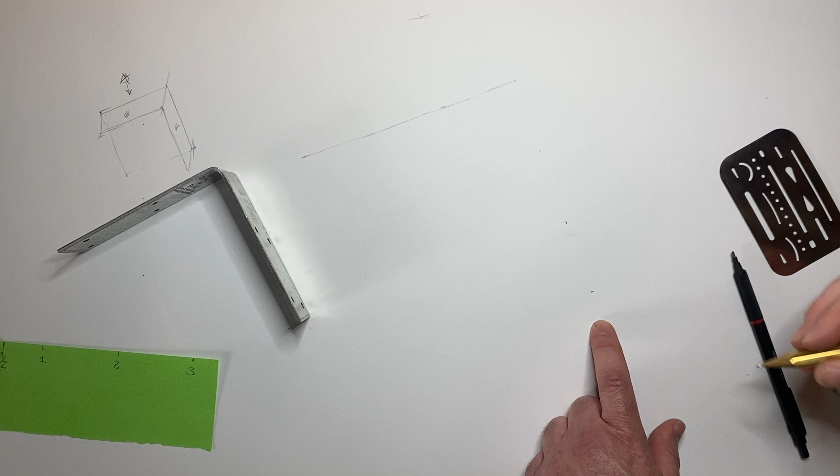So it's a little bigger than life size. I want to fill the page as much as I can. Now again, I could go ahead here and construct my next part, right? So, you know, we need another 3, so let's try where that would be and see if we got it reasonably well. Not bad. This is our corner if we wanted to draw another edge, but not too worried about that.

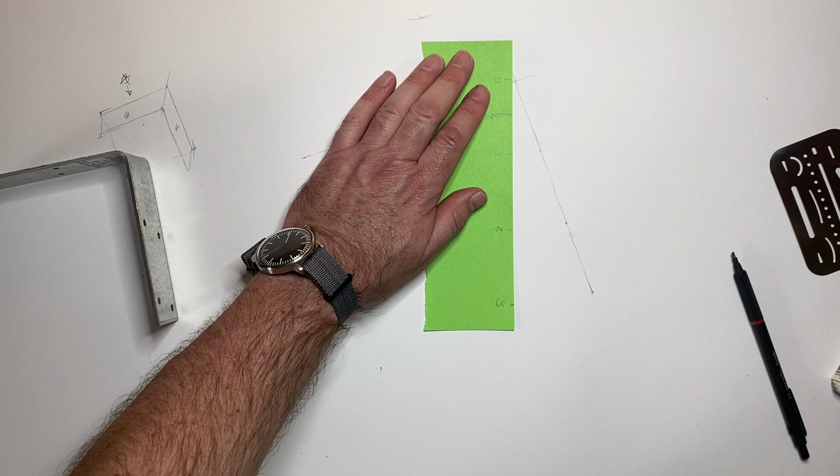However, we do need a vertical. Now it's 1 unit, so we're saying this is 3 units, 4.5, 1.5, which is a third of that, so 1 unit down, so we're going to use this half again. So half a unit down because of our compression in the dimetric. So this is, say for example, 3 units, 3 units,

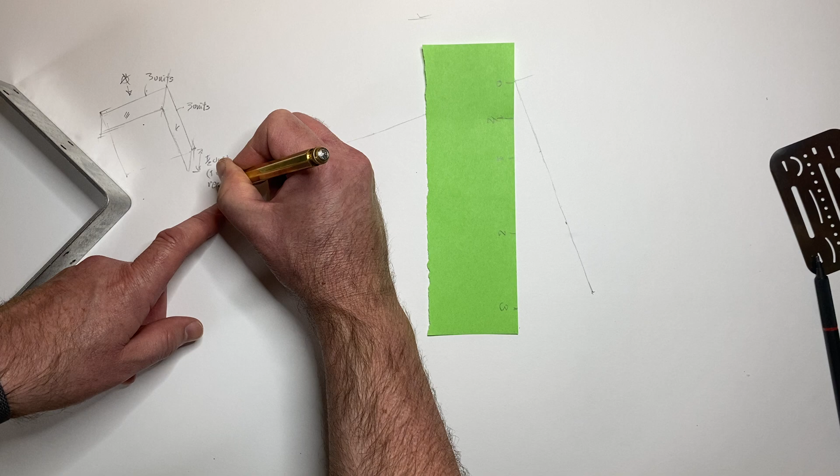and normally this would be 1. But for us, because of the dimetric, we're going to be going half a unit, which is 1 unit real. Half a unit. Okay, so measuring this off, again, to reiterate, 3 units long, 1 unit in reality, but because of the projection, it's half, 50%, so it's half a unit.

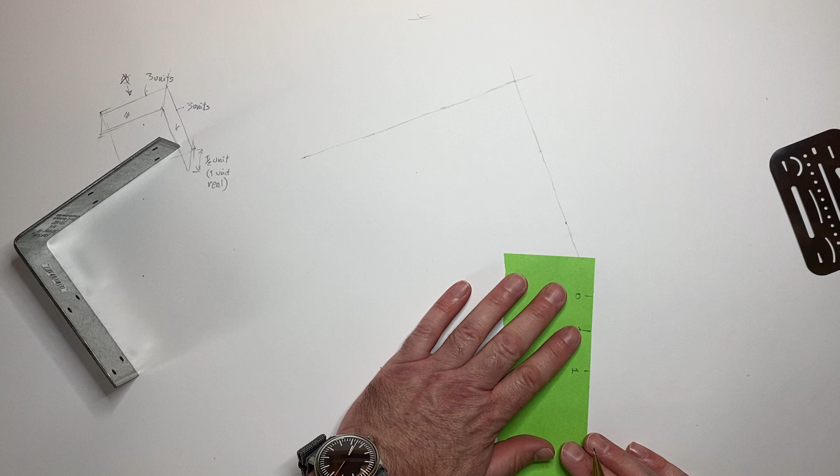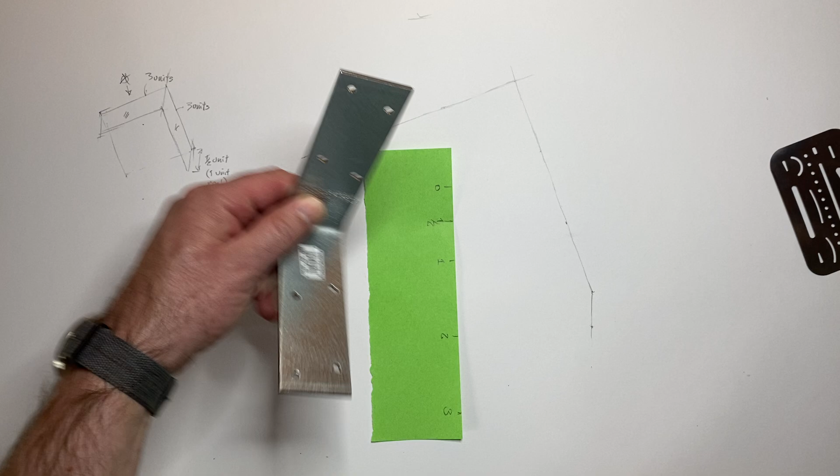After all that, to use my stick, or my measuring stick, I'm looking at the side of the paper here, which you can't see. Trying to get it fairly straight. There's 1, there's a half. Quite small, because it is quite a thin part. So no shock there. Again, we're going the other way. Try and get a vertical, make sure we've done a reasonable job here. Nope. Arcing around. It is hard to get this right.

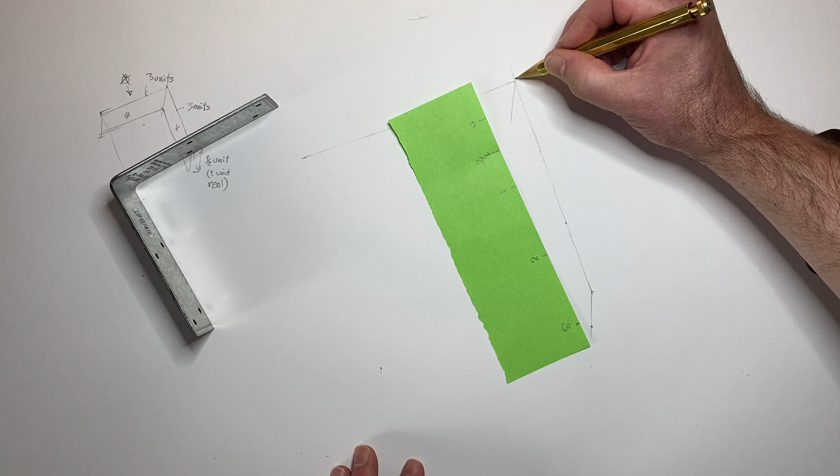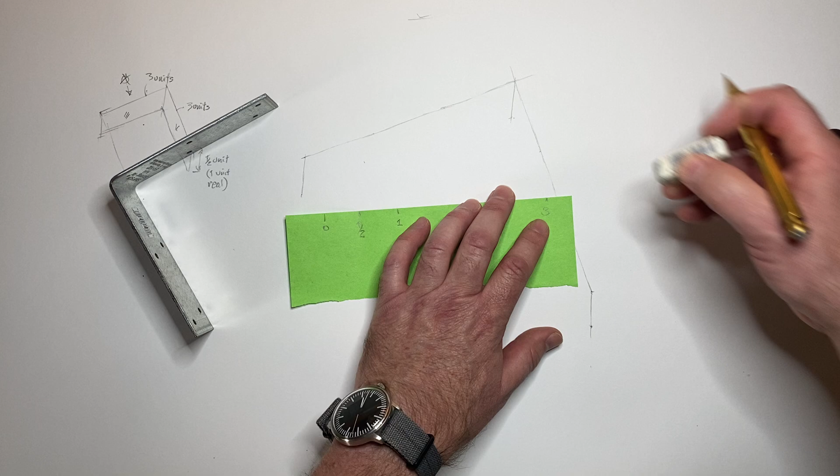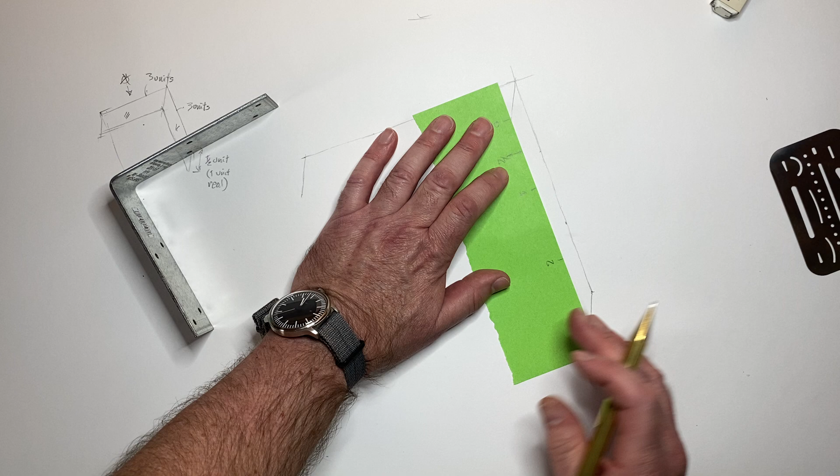So the ruler does help. So we've got 3. Trying to keep it parallel. Make sure we got it right. That's good. And if we want, we can add some dots again. If we lose our mark, we can erase this other one, so it doesn't confuse the video. Again, we can give ourselves some helping dots, helping hand. This is quite close, so this does tend to be quite difficult to sketch. Connect them up.

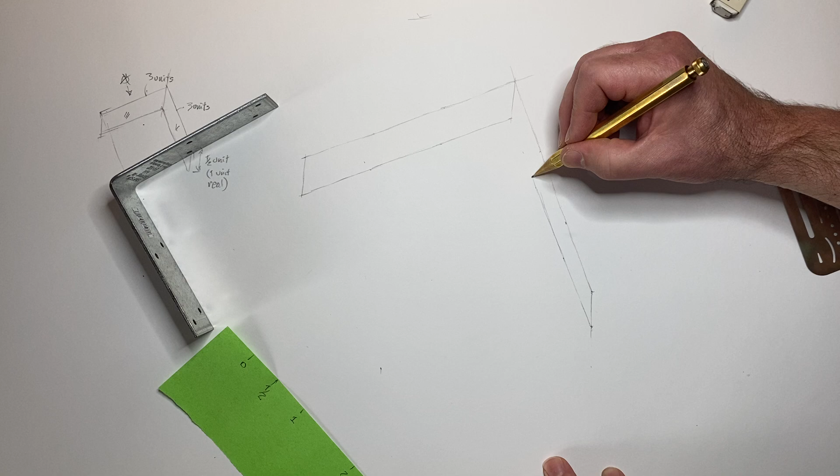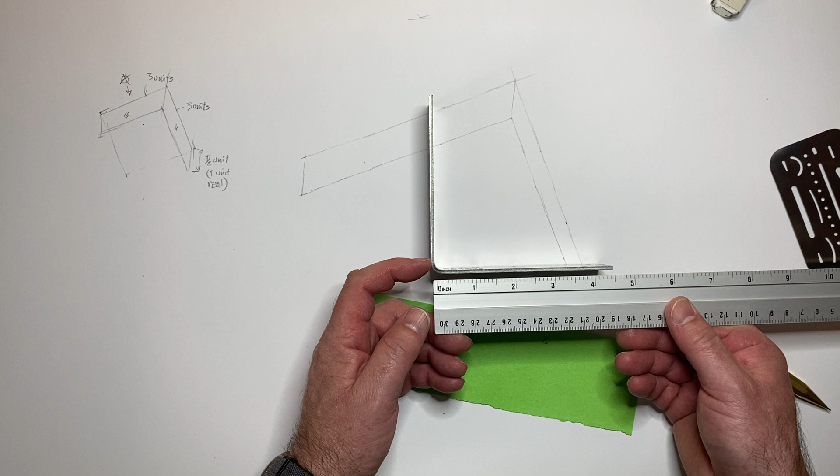Ooh. Now, which way? So we got 1 option, 2 options. Let's have a quick look. There's something strange about the measurements. See if we can, I hope this is focused, but 4.5. This is actually to the inside edge, if you notice. Whereas this guy goes to the outside edge.

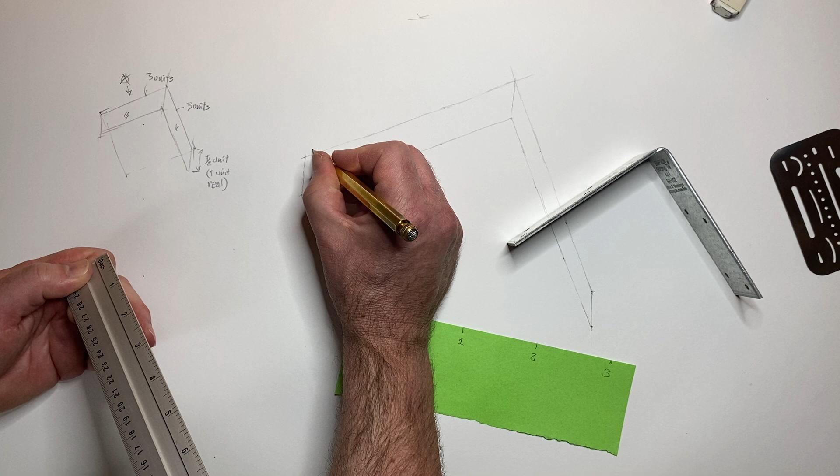So what does that mean for us? So that's our full length. This one's on the outside. So if we, for example, put our little helper here, this one's on the outside, the thickness. This one's on the inside. Now, I don't want to make this any thinner. It's also painful. So what if I say, okay, well, let's put this on the outside. Let's make sure we've got that right. So I want it to be the long length. I know it's very picky.

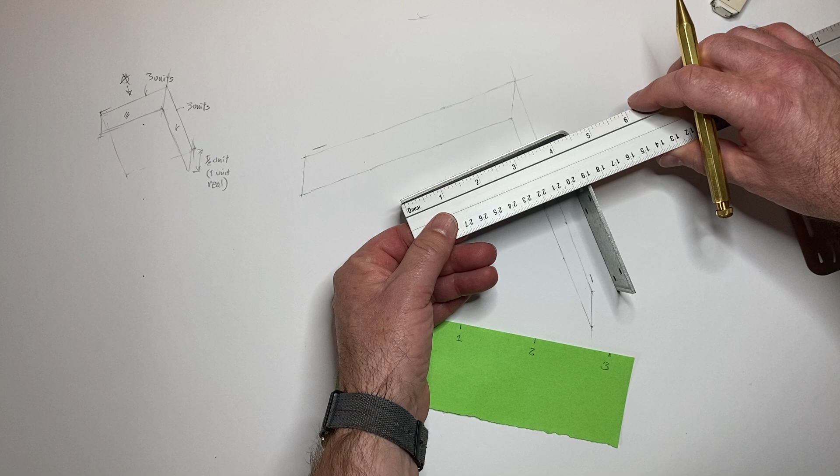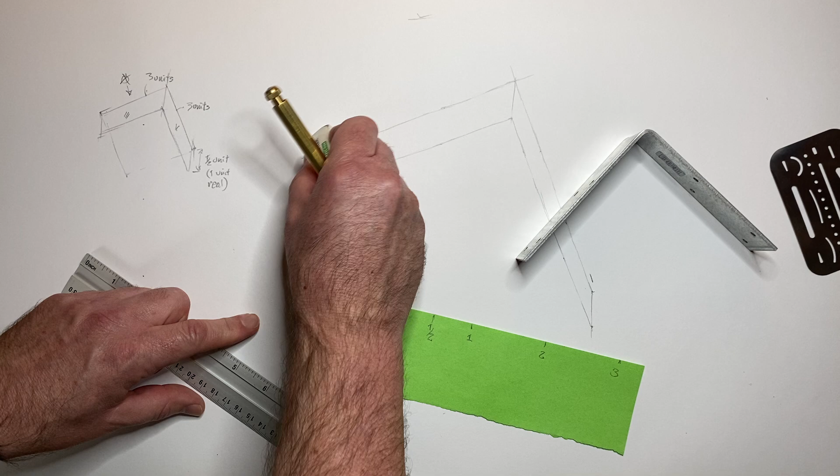4.5 on the inside. And that is to the outside. Hold on. 4.5. This is not on the inside. Sorry. I think I just said the same thing 4 times in a row. Anyway,

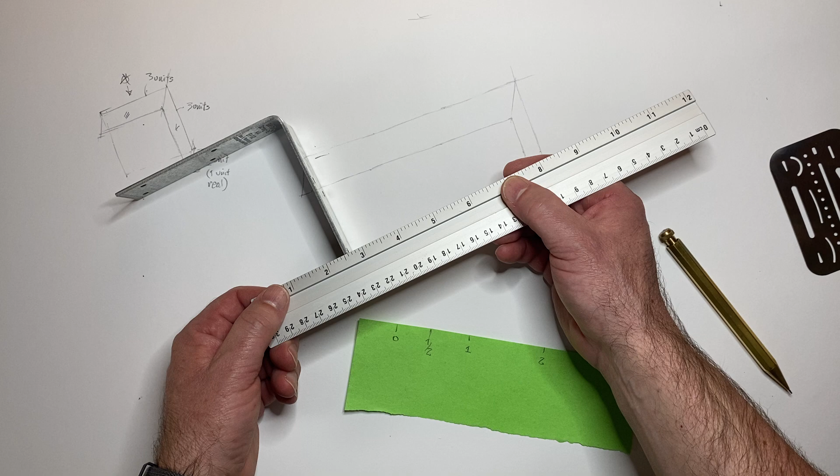this measurement here, the curve, the radius of this is actually, it looks like the same thickness as the plate. So let's see what that is. So I'm saying it's 1/8 of an inch, I think. Yep. So 1/8 of an inch, which is, what is that? It's an eighth of one of, hold on, units. And so there's all these problems, like which one are we taking? One way is just to say, okay, well, we're not making this ultra realistic. So let's go ahead here and just do an eighth of a unit. Won't be exact, maybe close enough.

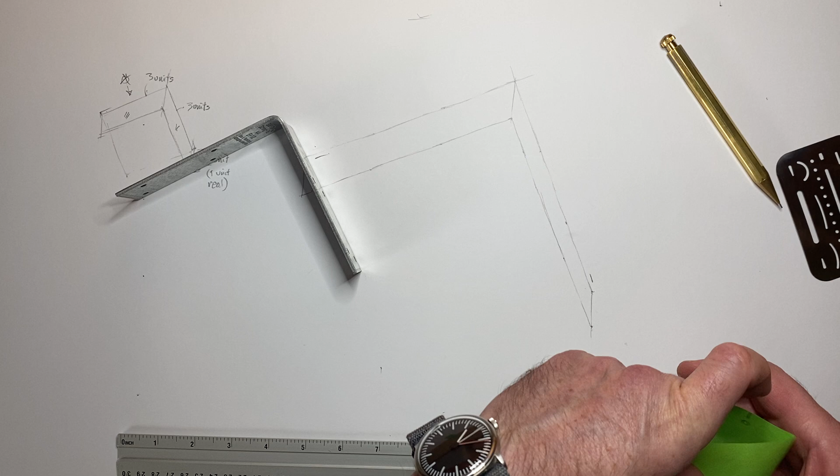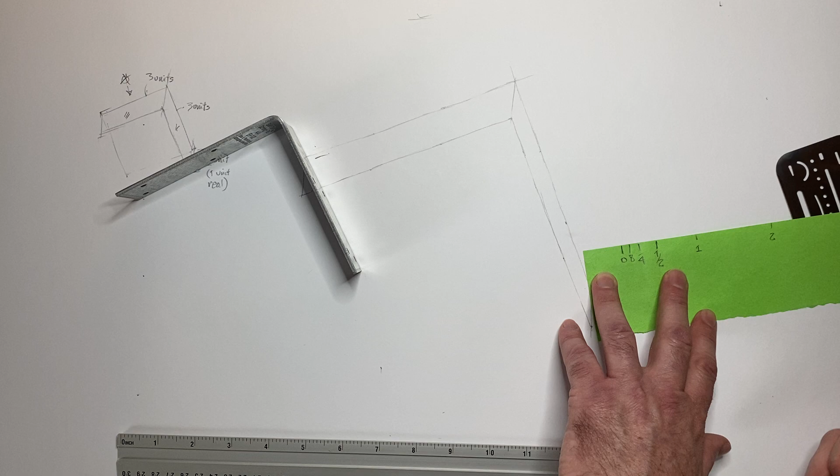How do we get an eighth? Fold it once more, quarter. Fold it once more, eighth. It gets really small, you can do your own, just do it by eye. There's our eighth. So let's go with that thickness. It's emphasized, it's way too big, but we're trying to show the viewer what we want them to see. So let's go with an eighth on the outside.

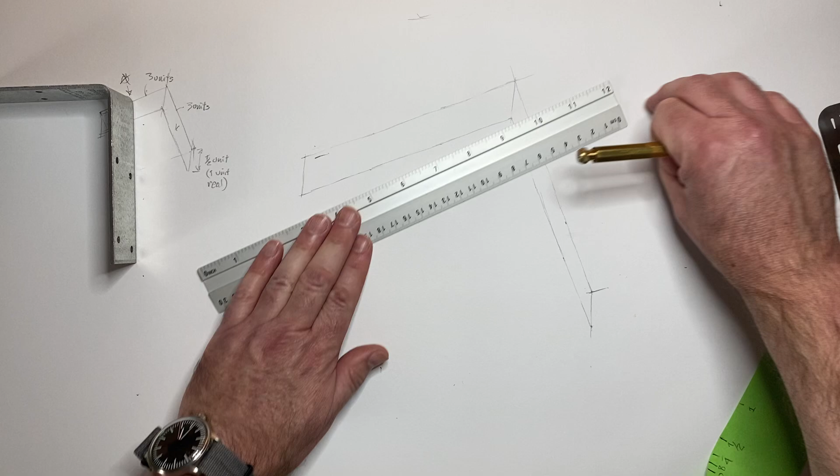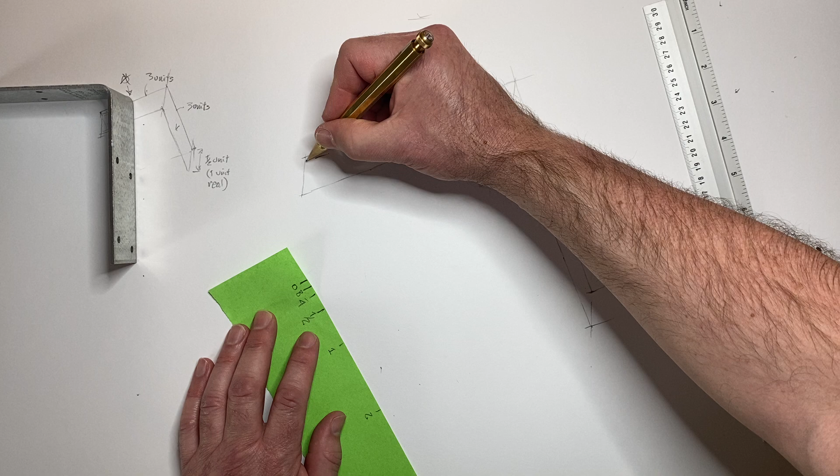Parallel in space, parallel in the sketch. So these two lines should be parallel. And are they? So sometimes it helps to use other things. Not really. Let's get rid of that overly ambitious angle. So the only thing I'm really concerned about is trying to keep parallelity or parallelness. Same on this guy. We're going inside this time. So parallel, parallel.

And we can use the measurement, because this is true shape, up here on the top. So because this is a square, and it's kind of a square, then we can just measure off directly here. We can put as many helpers as we wish on this ultra thin piece. Now we're going to the other side up here. So this is on the outside.

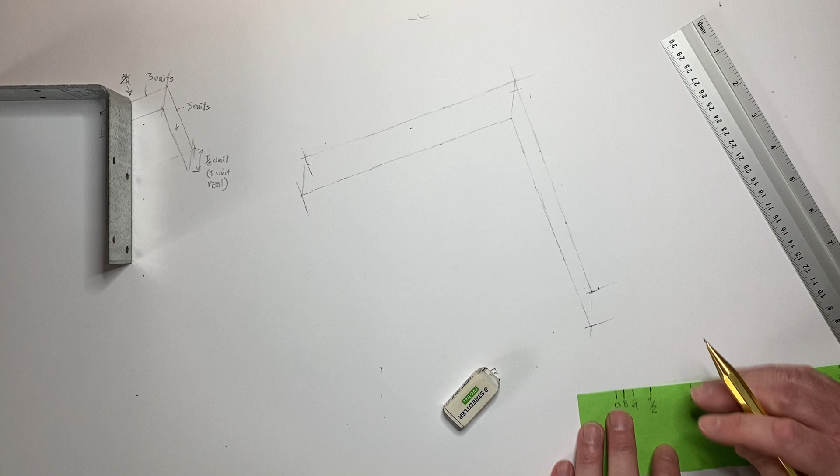And again, because there is another plane underneath, which is also true shape, we can measure that direct. So just to reiterate, this is our true shape, but because we have a straight profile, this underside is also true shape. So we can measure directly on there too. So what does that mean? It means that's our thickness at the end.

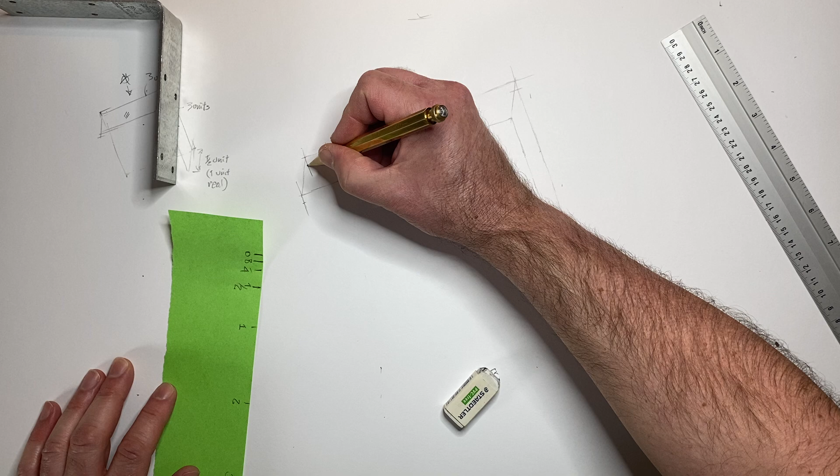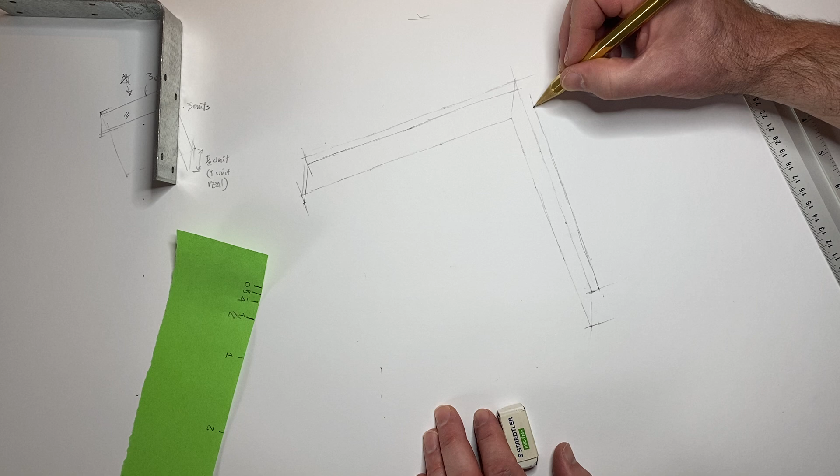Coming across really thick. I'm just going to go all the way here, but we're going to curve this later. So once we figure out where we are, parallel, get some helping lines here with a really weavy line. And then our thickness. I'm saying the inside radius of that curve is an eighth as well. So we're going to start trying to ignore the under construction, start and finish there. Same down here.

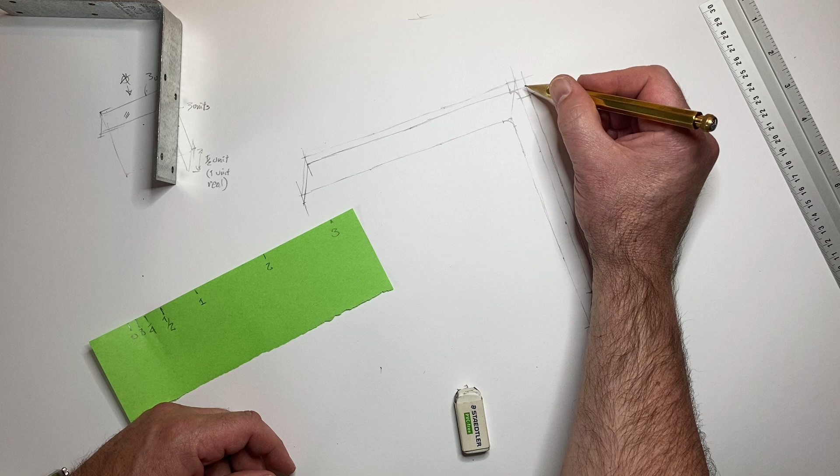There's ways to construct this and all this sort of stuff, but these are true shapes, so this will be a quarter circle. And the same up here, so the same size on both. Won't be able to see the back through this part, but we'll be able to see this backside of this arc. So we can kind of assume that it's bent smoothly, and it starts here and there, which will give us a quarter. You can see my sketch is not perfect, but it's not bad, I suppose.

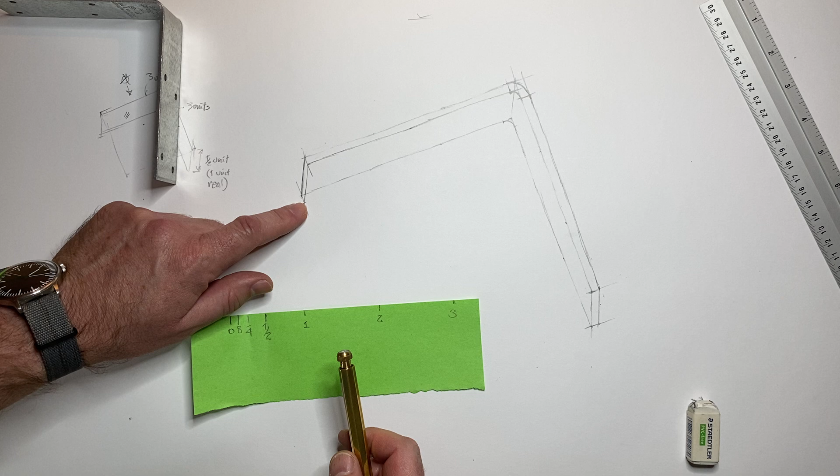So there's my arc. And the same will be on the back face, but we can't see that. So that's our shape. And we can now say we've discovered these edges. Now, I screwed up. So what's missing here? Well, I forgot to add the thickness underneath. Sorry about that. So let's fix it.

Give myself some help. Some of you have been sitting there going, you've missed it, bud. I'm going to erase this, even though it's probably not a big deal, but just so we can all see it. So there's our correct spot above this. So if you want, you could load that in. And we're an eighth.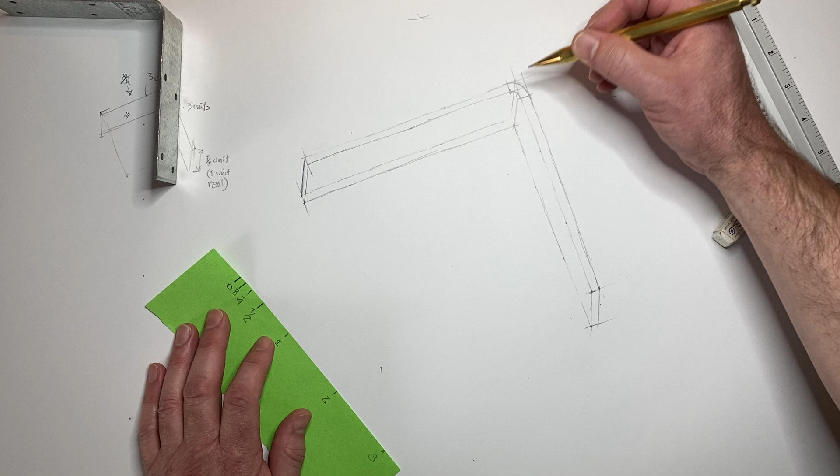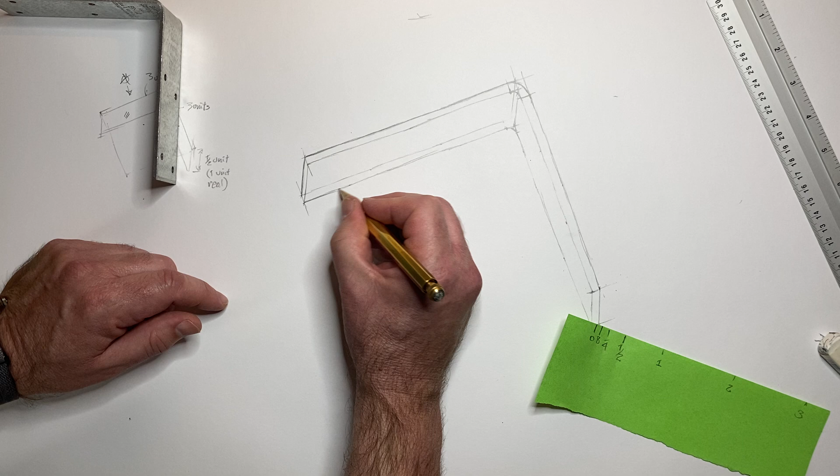That's more like it. So what we just did there, that check, let's make sure that our edges are all formed correctly. That's what that step is for. It usually catches errors that we've allowed or not noticed. It's not a big deal. You can always go in and fix it. Didn't do it on purpose, but it's not a bad thing to have happened. Make sure our edges are looking right. Kind of a preliminary before the hatching or the shaping.

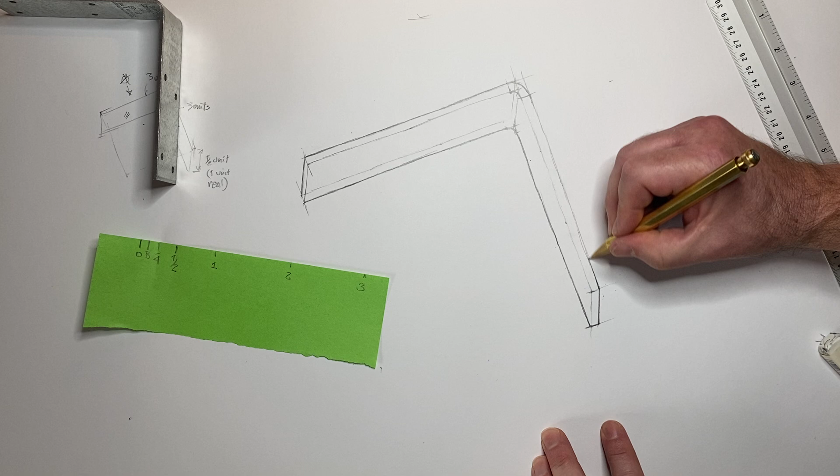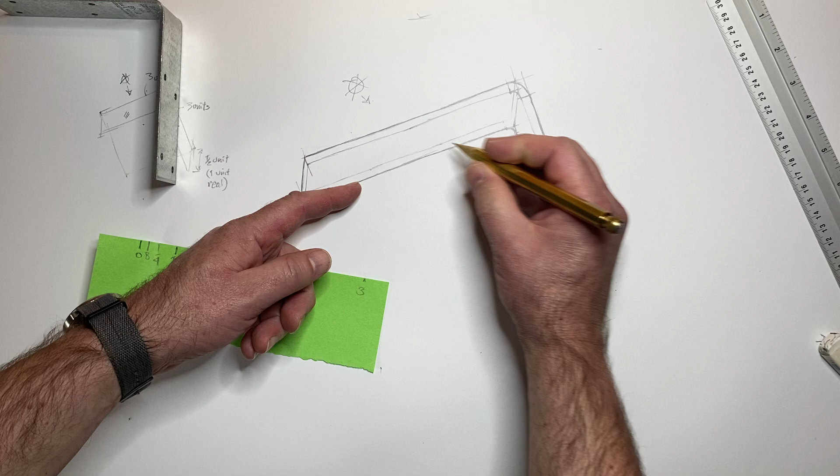Sun's up here. Now, this is going to be facing the sun more than this side. So this again is our 1, this is our 2, and that's our 3. The darkest, intermediate, and lightest. So the sun's kind of above and looking down. This will be hidden by the intervening wall, if you want to think of it that way. This will be second, it's further away, not the top, and this will be the last. Notice that there's 2 sets of 3s. One that goes all the way around, and then we'll have another 2 over here.

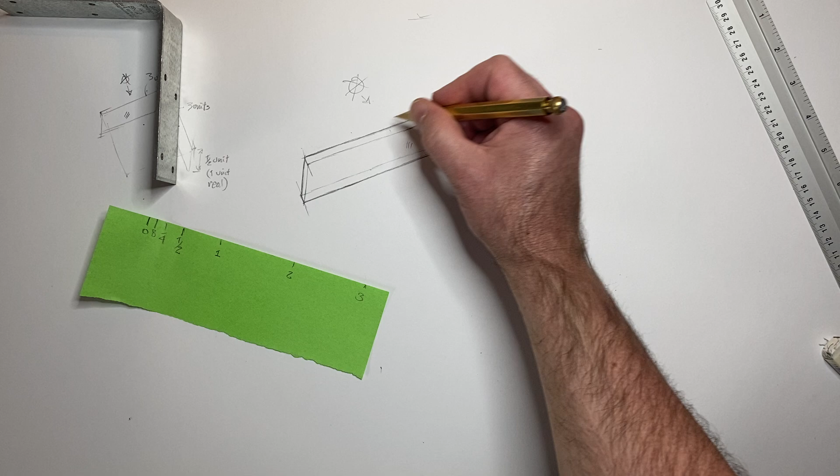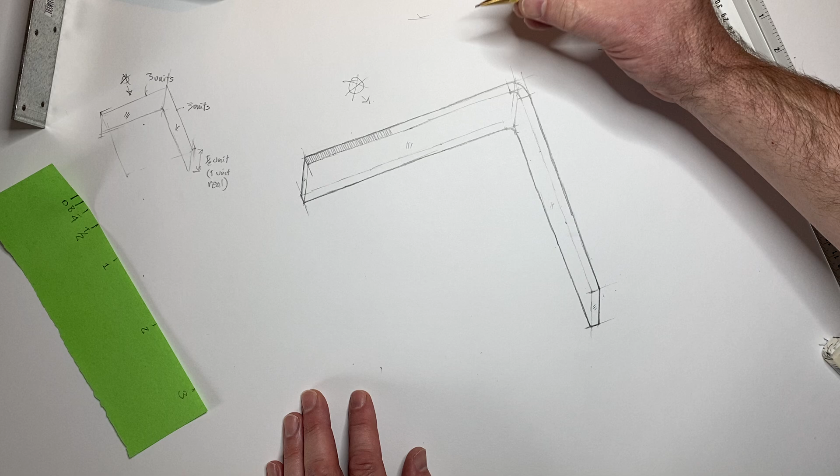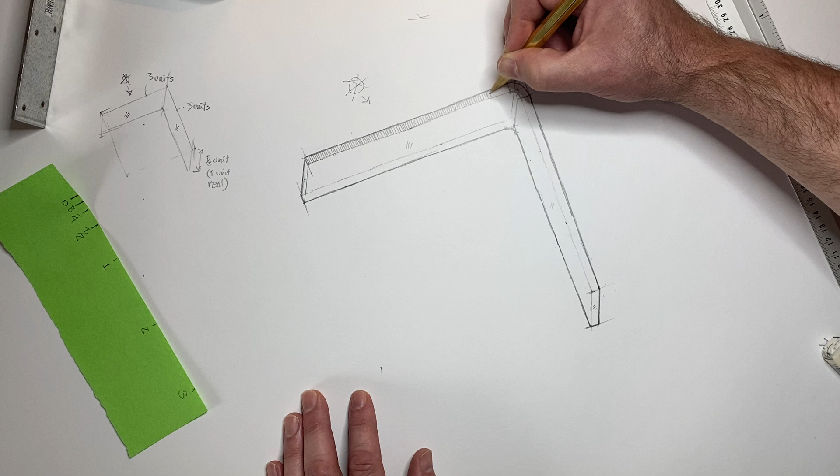That's the plan. We're not doing the holes, but we'd be able to measure those out with our unit stick if we wished. So let's go ahead here and just get started. The top is our easy unit, first lightest color, and just gonna continue right around. If I can. Trying to stay vertical, implying the shape here. So fun. Gonna stop here. Figure that out later, but I do want to go with its direction here, so it's a little artificial, but I'm going around trying to keep it the same. We'll return to that corner later.

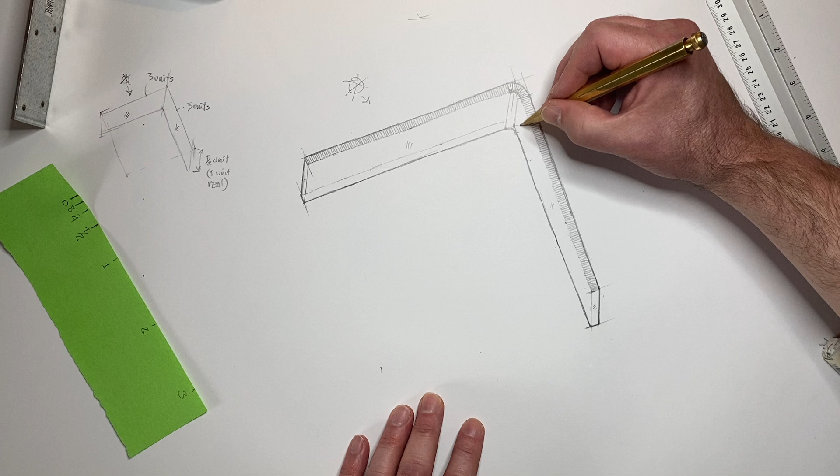In this curve, I want to emphasize the fact that it's going round, but it's also the same surface. So from CAD land, you would like to say this is all one edge, one surface. It's going to go round and radialify, if you want to think of it that way, those edges. If you want, you can connect these up together. It's up to you. We'll maybe come back to this later, because this might change our hatching as we go through here. Now, we've got 3 and 2.

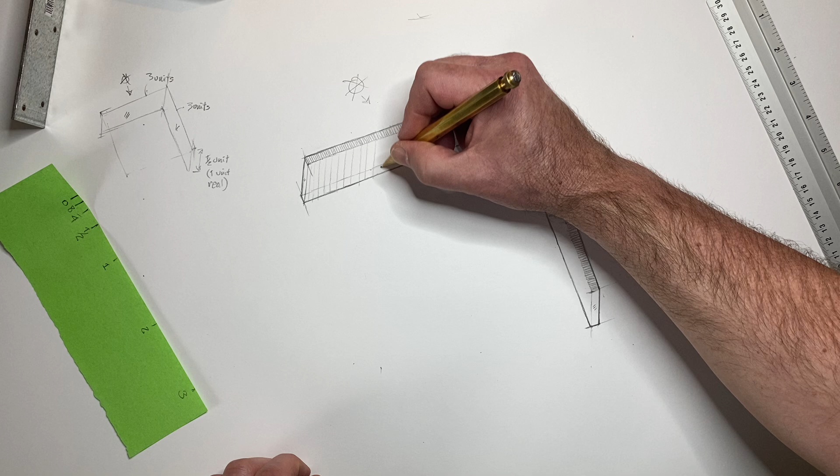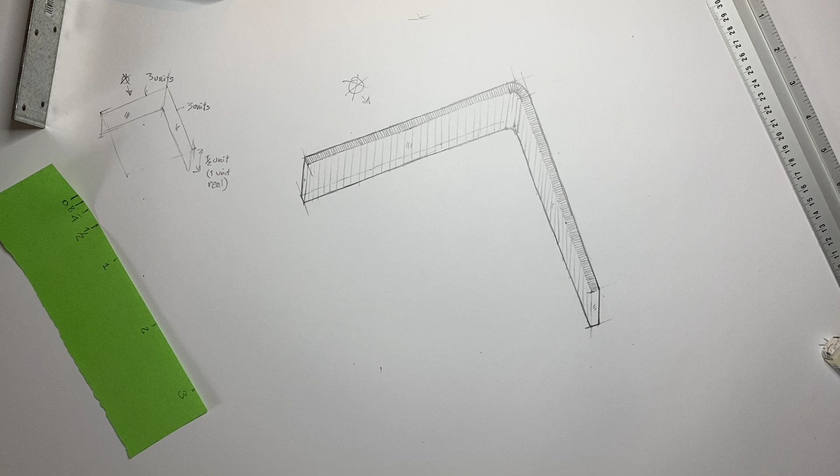Let's do the 3. I'm going to use the same approach as before. I'm going to try and just hatch this vertically to give myself some targets. Keeping it parallel. This is going to be a cramper. And all the way around into the 2. If I can actually do verticals here all over the place. I'm going to do the 3 immediately after I maybe emphasize this corner a bit.

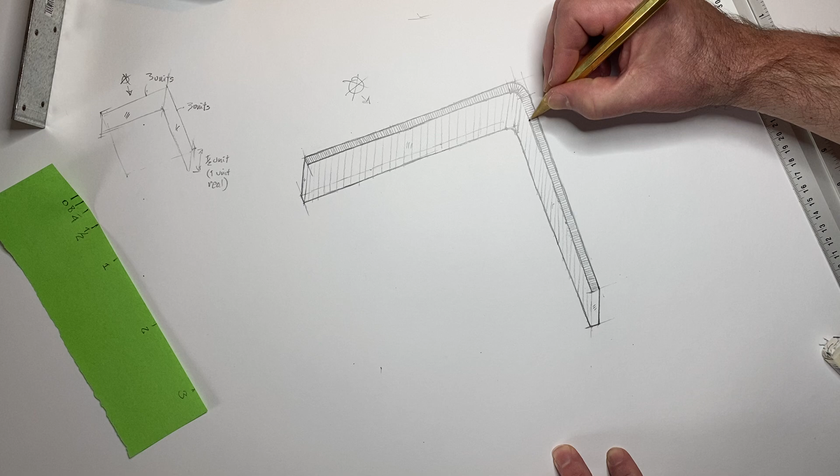Again, this is not a real edge, right? If you look at the real thing, there's no hard line on the corner, but because we're doing technical sketching, it's not a bad thing to do. And off we go with the boring, heavy hatch. This is our 3.

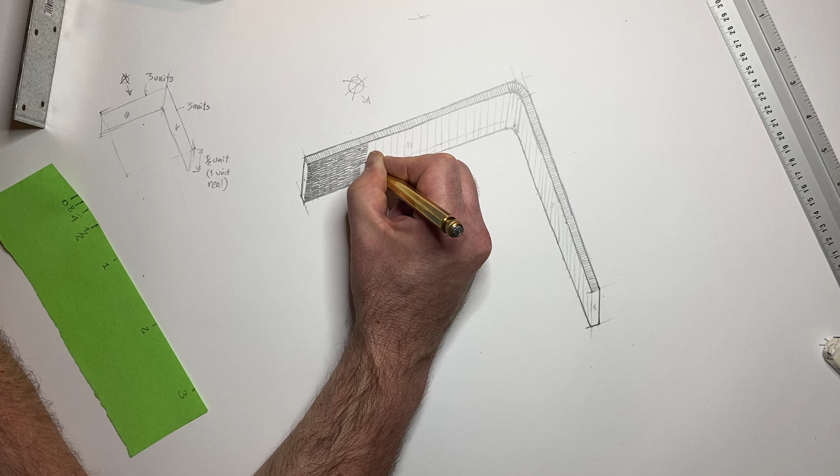I'm pushing fairly hard here. And try and keep them very close. Cramping slightly.

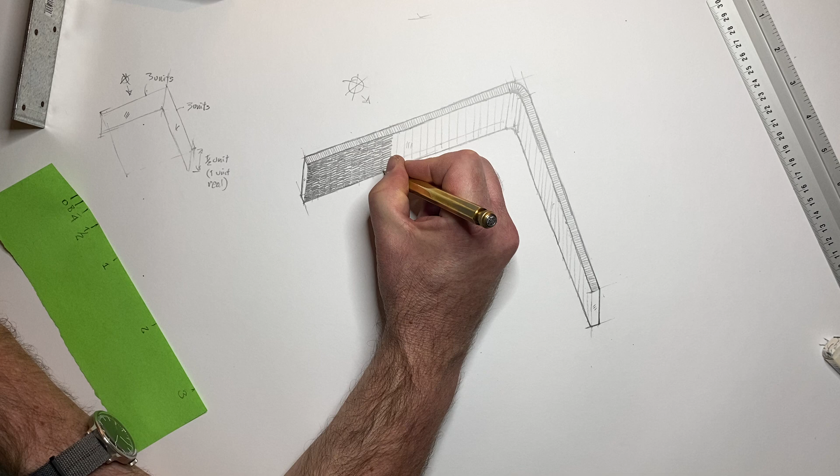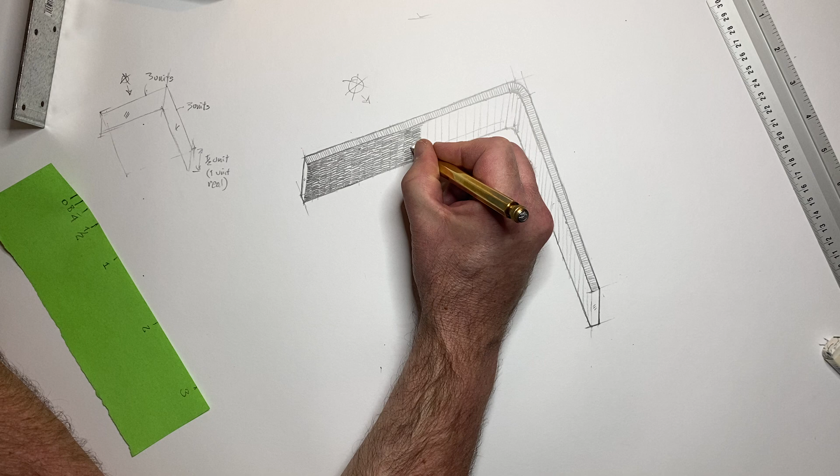There we go. That's the mech200 cramp running nicely through my, it's now on my wrist. I've had a whole summer of no sketching, so, or at least no hatching.

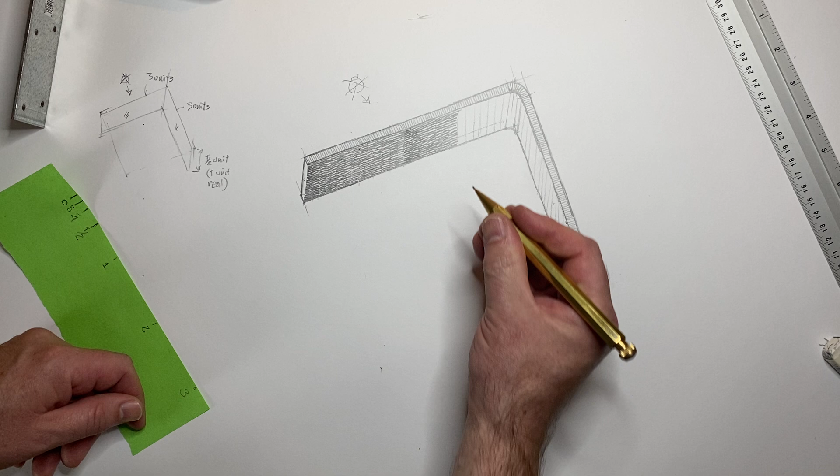Screw head underneath there. Starting to, can tell how much it's cramping if I'm not thinking about it by getting lighter and darker. It's okay. Hatching's not perfect. We're trying to show shape and we're trying to contemplate the object itself.

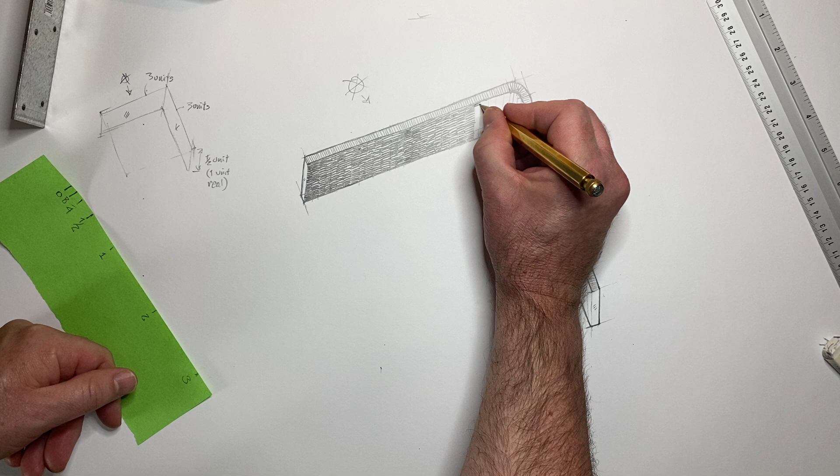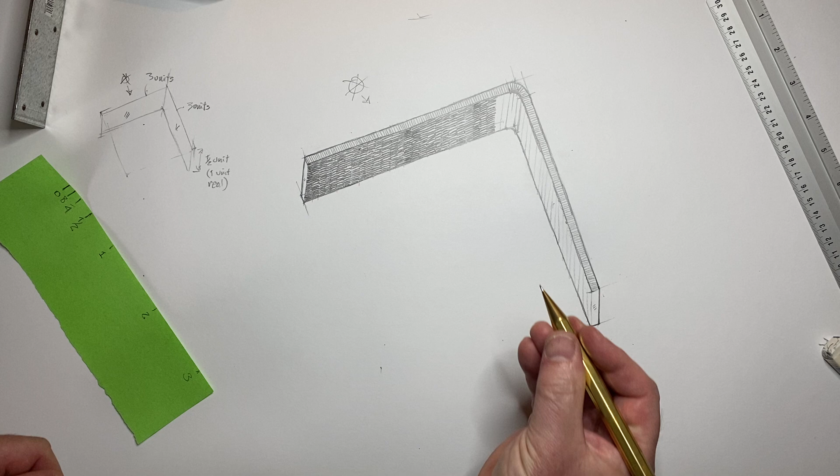Just trying to, oh, there's a sharp edge. So gouging into the paper, sudden darkness, my old friend. Leave it, once we get to this end here, I'm gonna leave it for a second. We'll figure out when we're gonna get around that corner, or around that bend. Okay, so that's our, hopefully our dark spot.

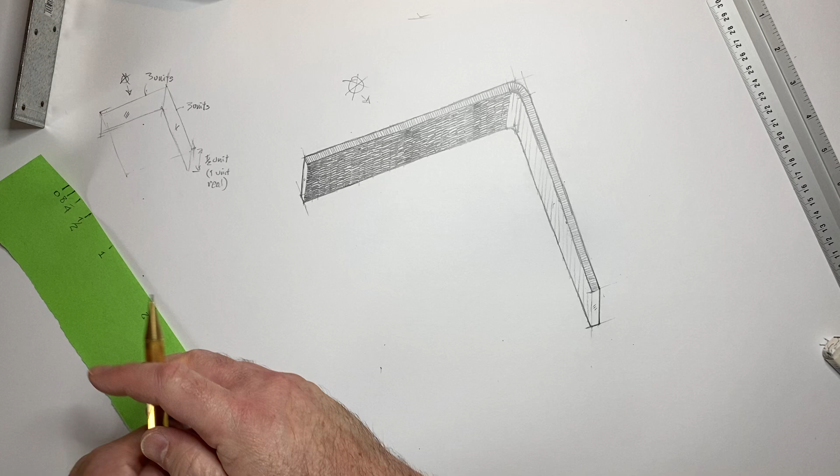Now, this is really bad formed in some places, but if you notice that there's quite a bit of differentiation here, you can smear it slightly. Again, some people are purists, they will not do this. That used to be me. Don't worry about going over the edge. You can also use a smearing stick, if I can find one. I had one somewhere. I'll keep an eye out for it.

You can use your finger, which is fine. I'm just looking for it. Don't have it. Smear it with this. The more greasy your fingertips are, the more it'll smear. But don't get too carried away. Again, we're not doing unicorns, so don't get crazy.

I'm going to try to go from this side here. Now I want an intermediate, or second, so halfway in between here, perhaps. And make sure that that's, is it obvious? I don't know. Let's have another go on the next edge. Not bad, a little bit hairy, but what we want to do is transfer around and make an intermediate. So this would be kind of similar, maybe a little heavier. I'm also going to curve the lines a little bit, even though it's not a big deal. And then a sort of heavy intermediate go around this part of the bend.

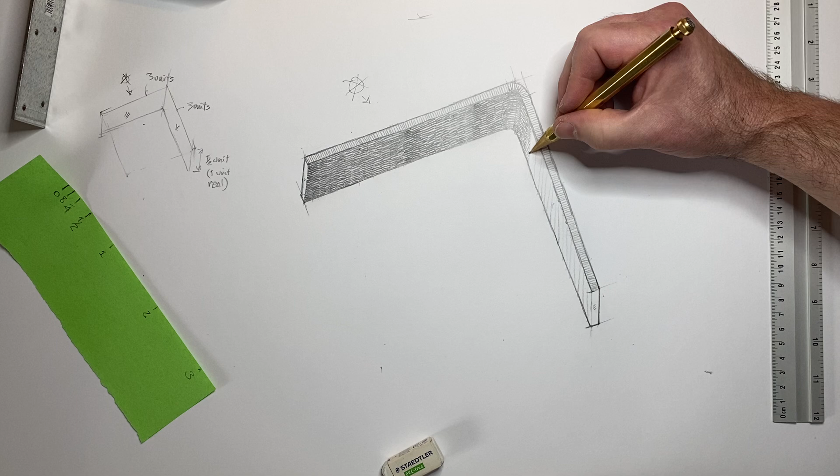We may need some help in here. So for example, you might want to darken this up as we go around, but we'll figure that out as we go. So again, getting a block of color right in here. Too much tone, but not enough to make me erase it yet. See, it's already a bit smudged in here. So we're just adding lead or graphite over the top of this guy.

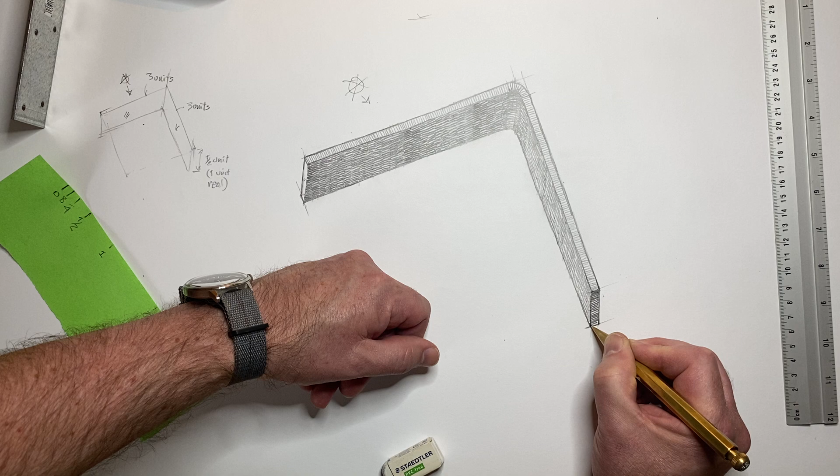Smudging is inevitable. I don't want to turn into a person who has to get rid of all the smudging using protectors and all this sort of stuff. We should be able to sketch through adversity, shall we say. So don't need to get so carried away. What color is this end? Well, it's actually a 3 because it's parallel to this face over here, so this is quite dark. This guy's a 2, so similar to this. So not so dark, but darker than the top.

But again, we're kind of done here, but we need to maybe emphasize this guy. So again, if you watch the cube videos, you'll see that one of the tricks or one of the shortcuts, or one of the lazinesses, how about that, is to actually just do a piece where it's closer to a contrasting tone. So for example, this wants to be darker than this third or the darkest part, whereas this one here wants to be darker than the top. So you might want to try and show that.

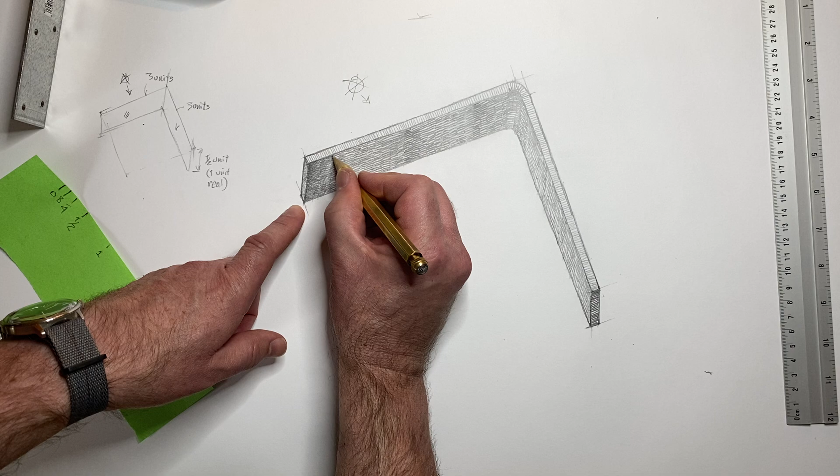Again, the darker you make this, the darker you have to do to here. So you end up in this sort of arms race of darkness. Eventually you'll have so much graphite on there you won't be able to tell, and you'll have to erase it out and start again.

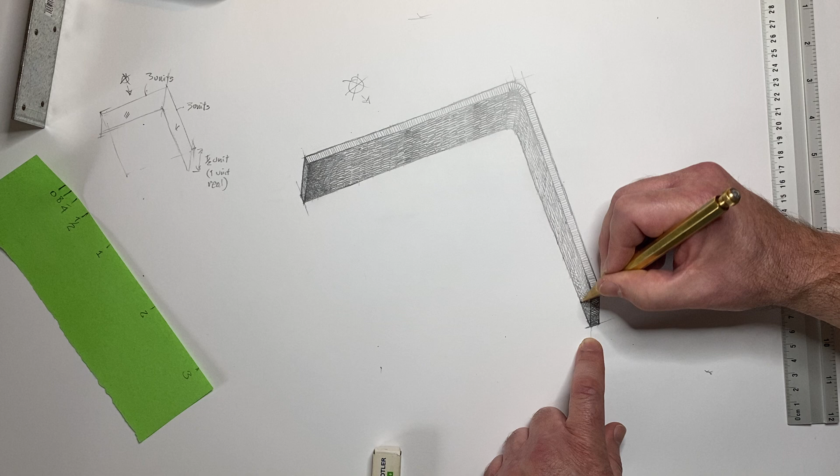So just covering lines in almost random directions, trying to show shape. Same over here. I want to emphasize that this is totally different, but also not too light. So this is a little bit too light down here. So just adding hatches in various angles, directions, to emphasize the shapes that we have.

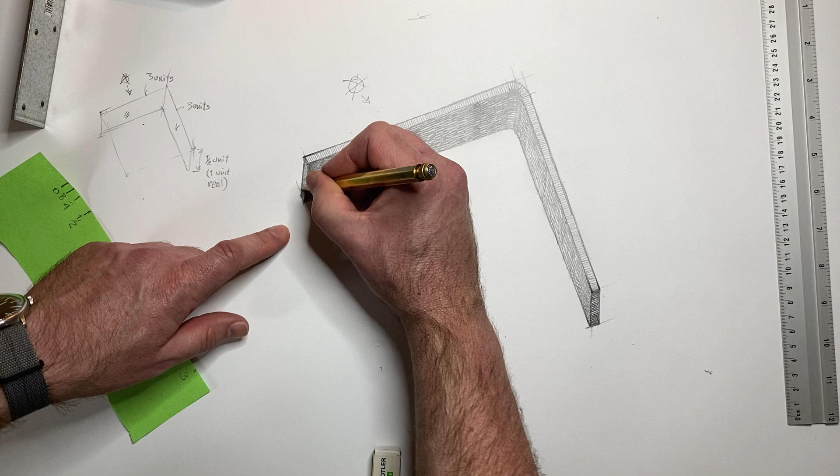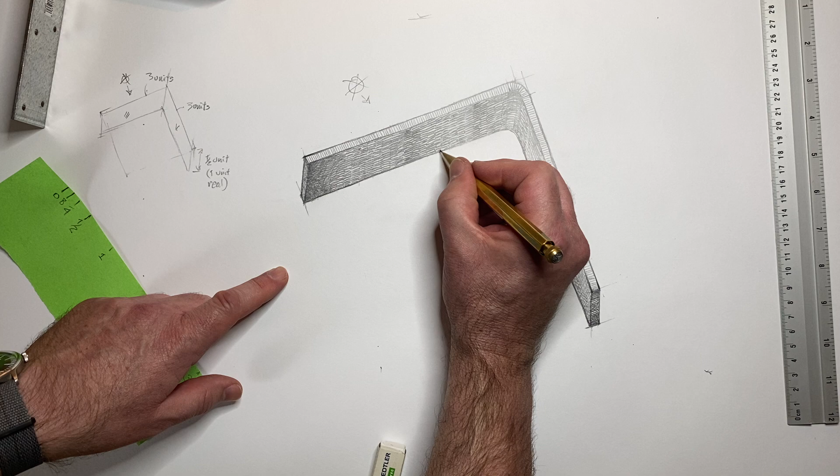Stand back at it. It's going to look a little twisted, right? You expect to see, probably even now, we're still expecting to see a little bit of perspective, but it's not in there. So just leaving it. Again, I want to emphasize the perimeter, so I'm going to go ahead here and do the typical Colin thing, which is run out of lead halfway the line. Go around the corner. Got some edge here, edge is okay through here. I want to say this is quite clearly rounded here.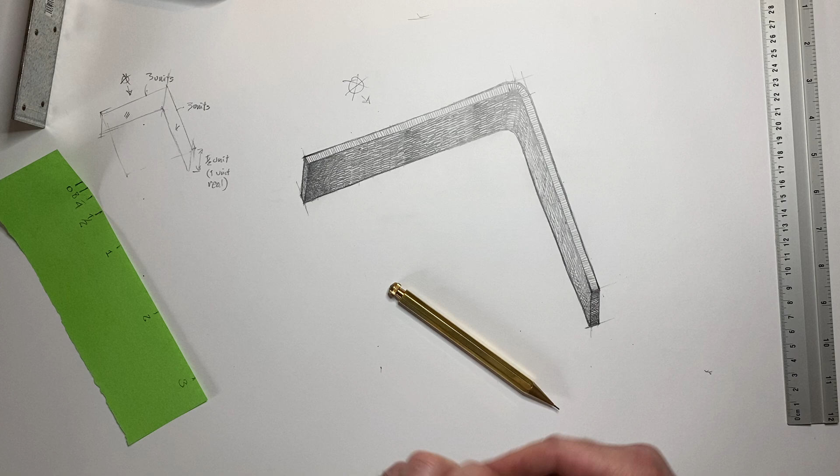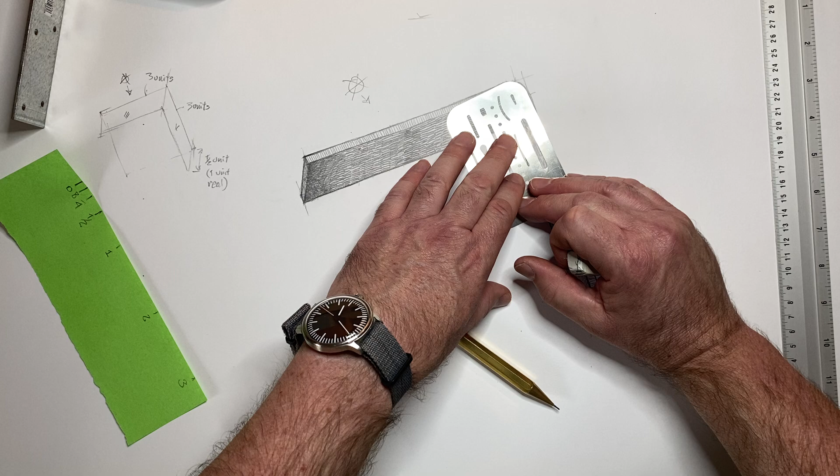You can use your eraser shield here. Now, before we've been using just the edges. One of the advantages of this thing is it's got all sorts of curves on it. So we can see one here. So you can kind of sometimes get a half a curve per time. So for example, clean that edge off there. And then we can kind of work our way around doing a bit at a time.

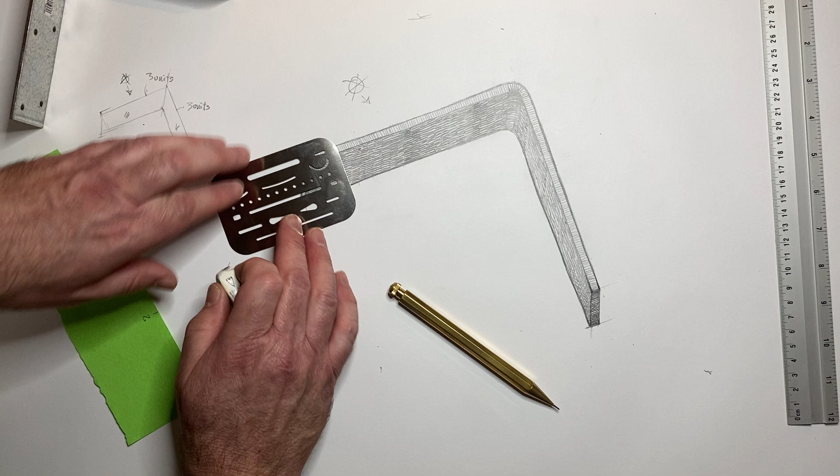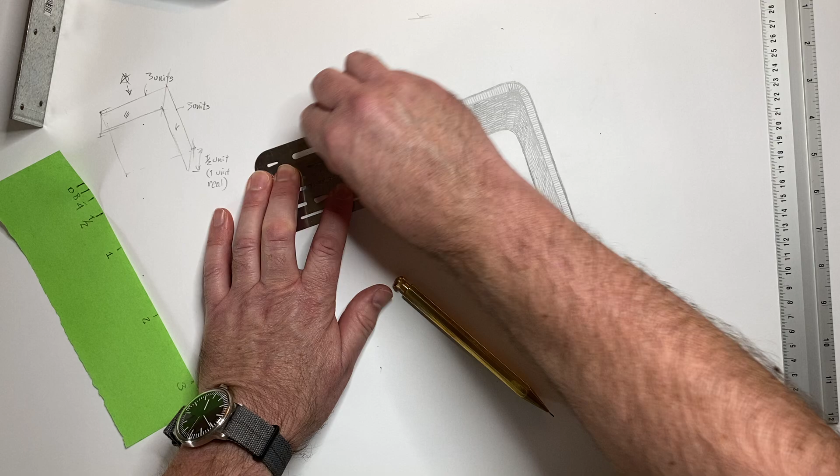So it's up to you. If you want to do this stuff, feel free. If you're feeling a little weary or wary of your erasing, you can use this interior slot, which will kind of, it's easier to keep it straight and from rippling. You sometimes bend the eraser shield, which is why this one's bent. So, not too bothered with this stuff in between, but I just want to tidy up the corners. Not too much though. Right, so I'm not going to erase off this guy. So the slot's good for that.

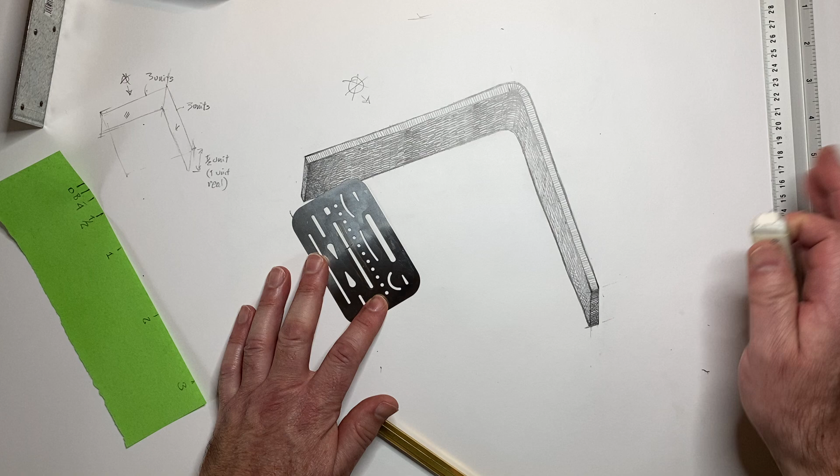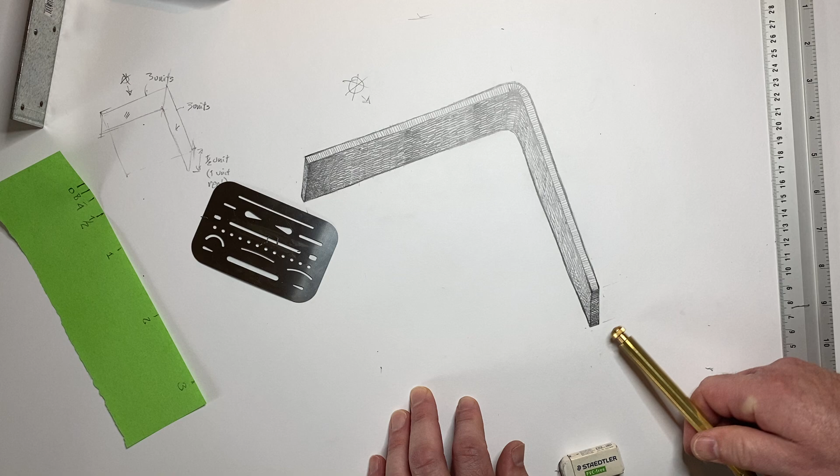So I don't want to get rid of all of my construction altogether. It's just enough. So for example, here I'm going to get rid of too much. So I'll use this edge, this little thin line. Gives you a nice edge, which is great. So this is, there's 3, 1, 2, 3. This one's quite good for this sort of stuff. So the intermediate line is often used for this. Screwed up. So you can add it back on. Right, we're not trying to make it into a computer rendering because we need some waviness and all that stuff, but it's not bad to have it a little bit tighter.

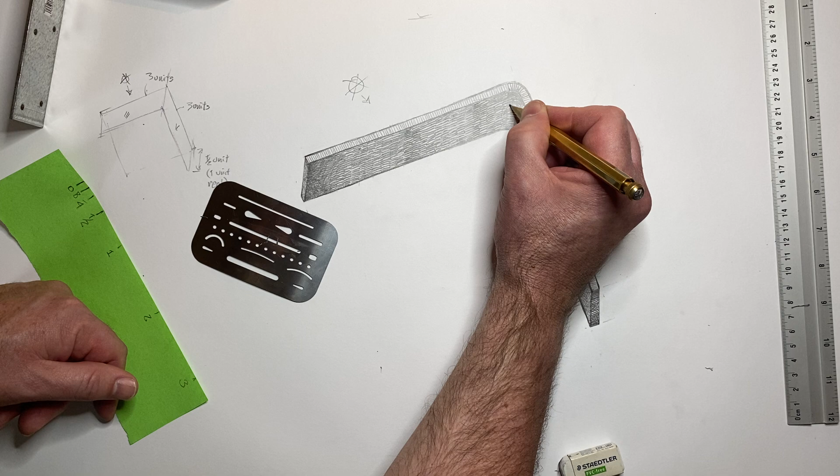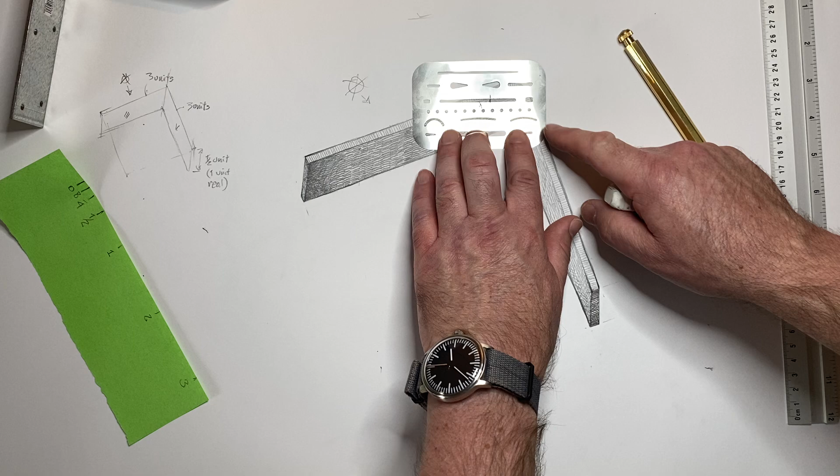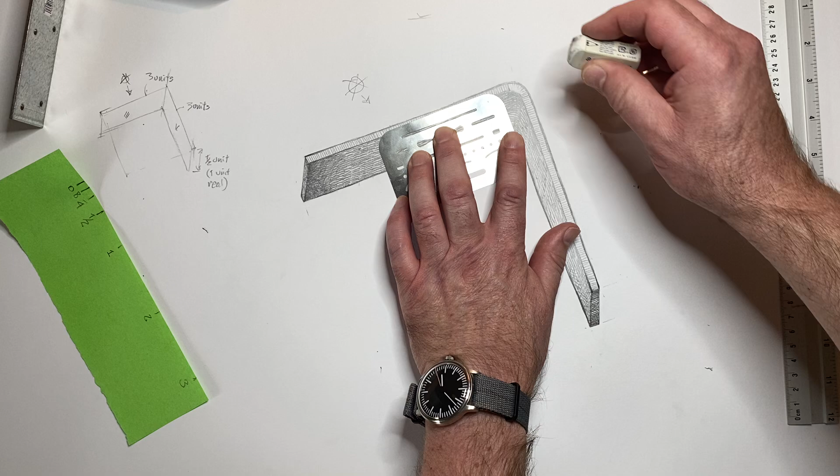Now, this looks like it's getting fatter in here. So again, emphasizing the corner here. Emphasizing this curve and the darkness below, I think. It's getting dark in here. So one thing I can do is actually get in here with some of this shape. See this little guy right here? Some of these arcs. I'm actually going to lighten this out as best I can, slightly. So I'm just touching it. If you have a kneaded eraser, this is your chance. I'll talk about that in another video. So just erasing that, cleaning it out.

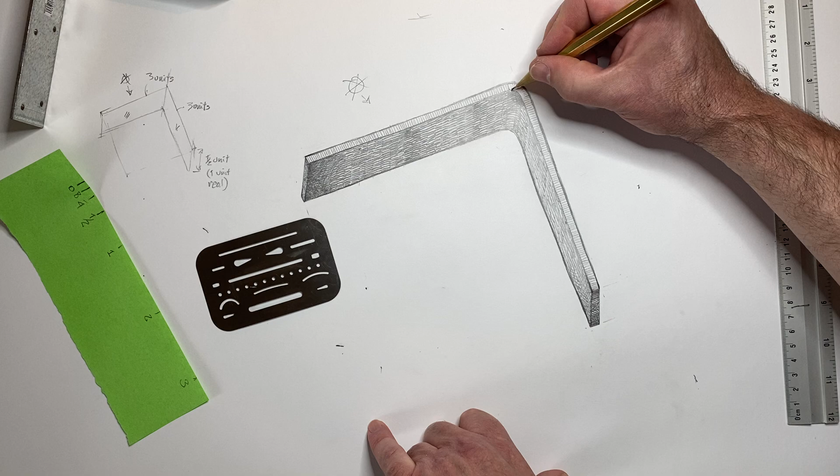Let's try again. Try to get the weight about the same. Having a hard time here. So try and match up the lines to what's already there. And because you drew them, you should not have a hard time getting them replaced. There we go. That's enough. So that's our part. There's our original.

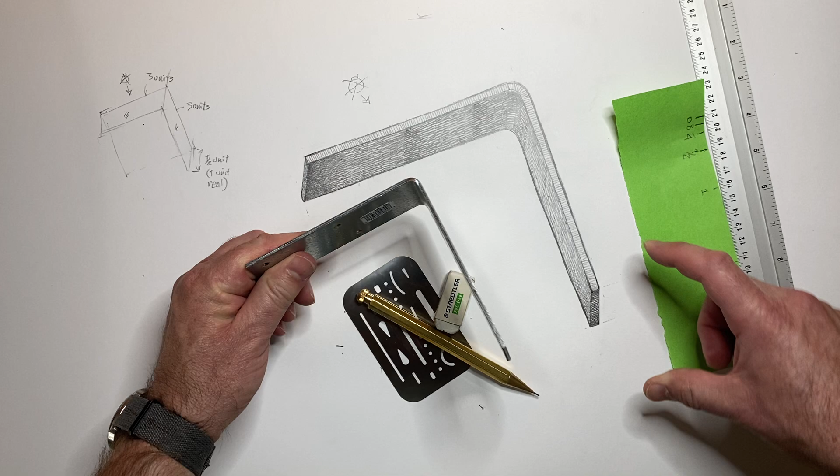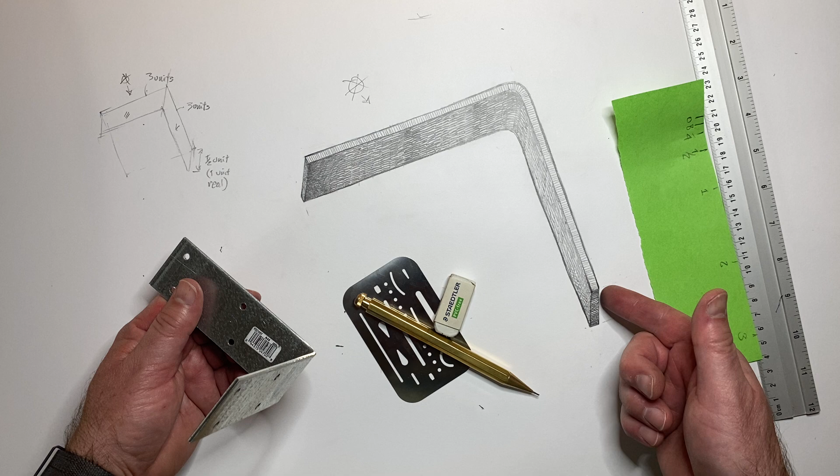Again, later we'll put on dimensions and stuff like that, I think, but for now we've really emphasized the thickness. We've not done the holes, so that would be our next. Erase out some spots, put the holes in, we could do that. But the key thing here is just to get shape and use a dimetric. Again, it's 3 units long, squarish. Again, dimensions will do that. We didn't really change the length very much because again, we're always going to be aiming at CAD. So eventually somebody's going to put this into CAD, and that'll be where everything is defined to the nth degree, right?

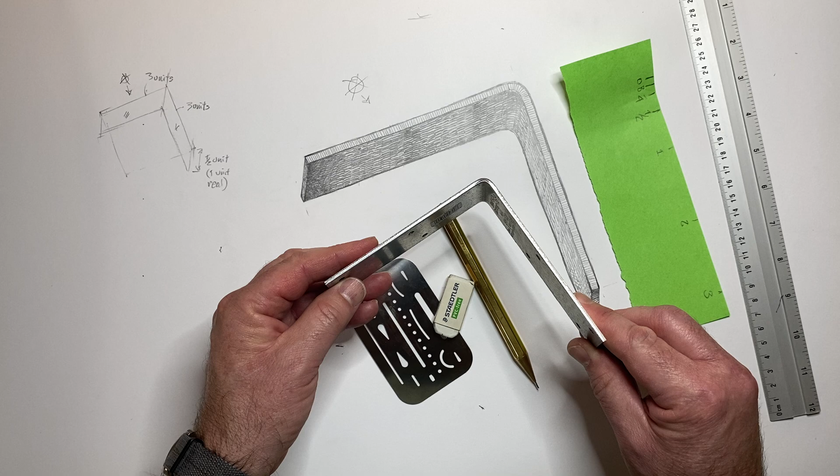So we're modern mechanical designers of some sort. We don't need to get crazy carried away with a sketch. However, we do need to show shape. We've done that. And we've used a dimetric. That's all kosher.